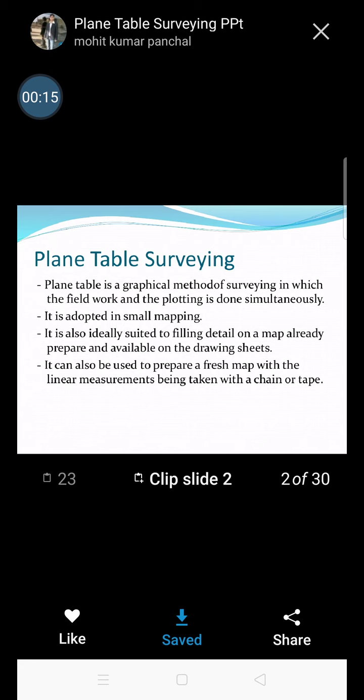We have started plane table surveying. In our previous lecture, we have seen plane table survey, a graphical method of surveying in which fieldwork and plotting is carried out simultaneously, which is used for small scale map. The plane table consists of a plane table and a tripod stand.

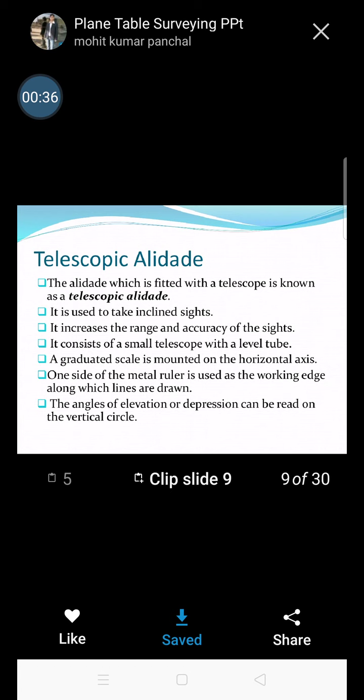The instrument used for bisecting the object is known as alidade, as seen in the picture. There are two types of alidade. One is called simple alidade, and this other one is called telescopic alidade.

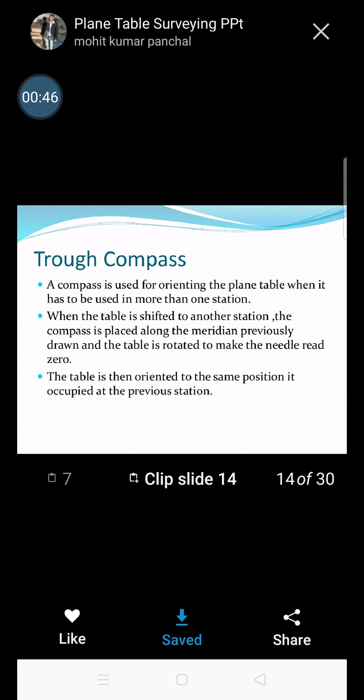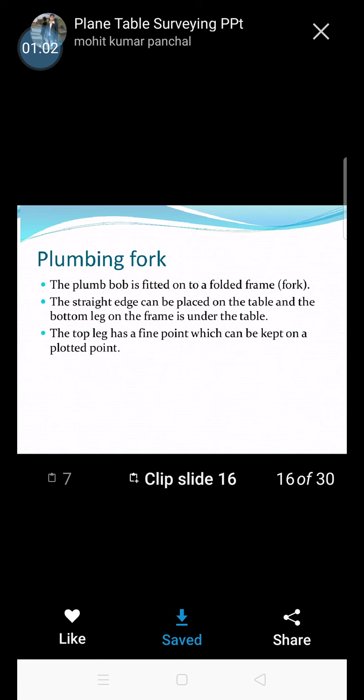For leveling the instrument, a spirit level is used. Trough compass is used for the purpose of marking the north direction and for the purpose of orientation as well. As we can see here, for centering purpose a U fork is used.

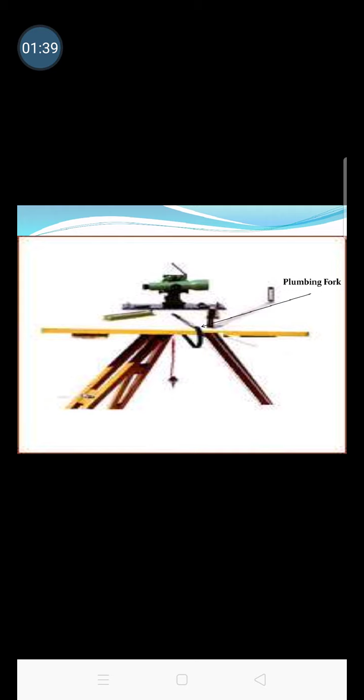Along with all these accessories, the other accessories required for plane table survey are a celluloid or zinc drawing paper sheet, drawing clips, pencil, eraser and waterproof cover. Unless and until all these accessories are with us, we are not able to use the plane table in the field.

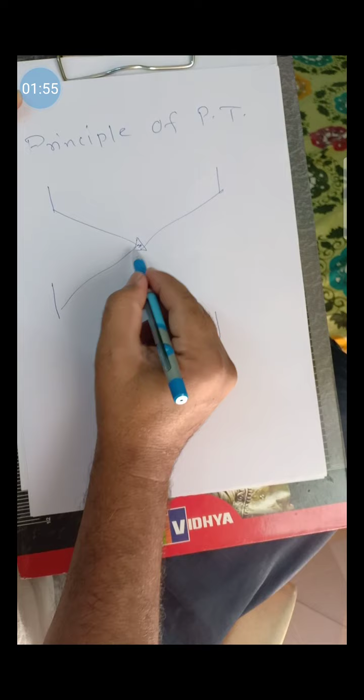Hereafter, before using the plane table in the field, we will study the principle of plane table. The principle of plane table is that, as you can see in the figure, there are some objects, and the lines drawn through the different objects should pass through a single point. This is the basic principle of plane table surveying.

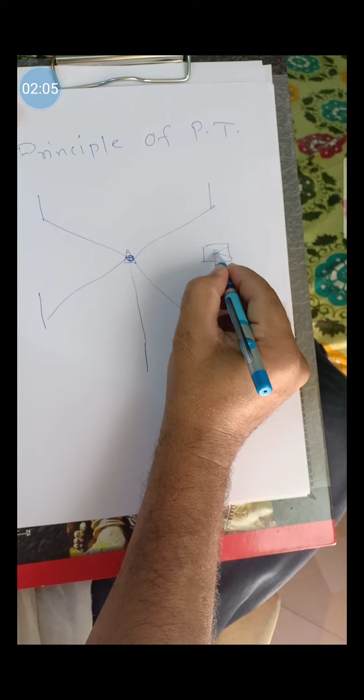You can see in the figure the different 5 objects, 5 ranging rods are there, and lines drawn are passing through a single point. That is the principle of plane table surveying.

That is one point that has been skipped. Now we can see the different temporary adjustments before actually using the instrument in the field.

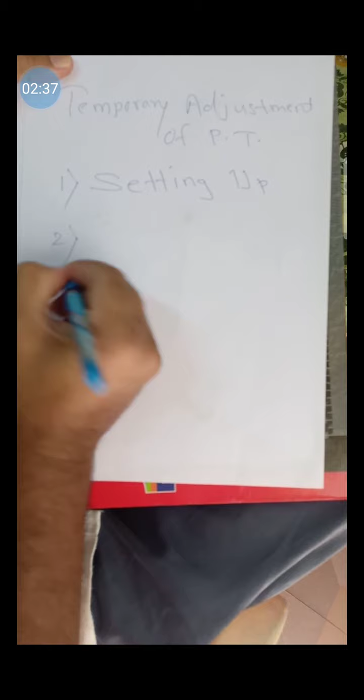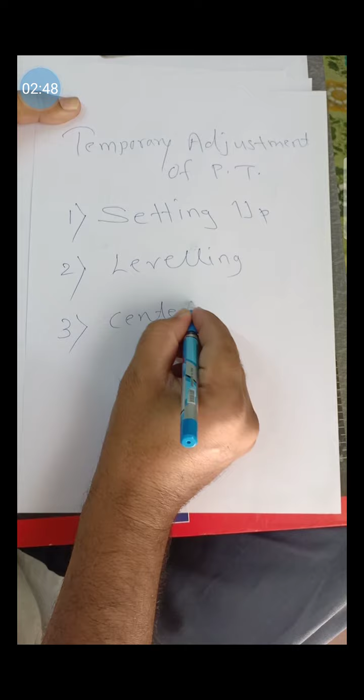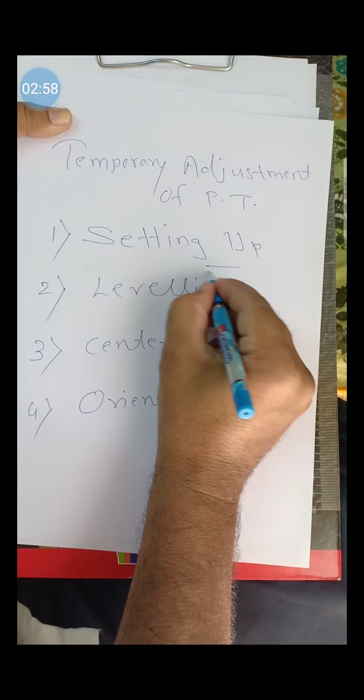We have to carry out some temporary adjustments before using the instrument, and the very first adjustment is setting up the instrument on the tripod stand with the help of a wing nut. A butterfly-like wing nut is there, which you have to use for setting up the instrument to a convenient height, and with the help of the wing nut fix the plane table on the tripod stand up to a convenient height.

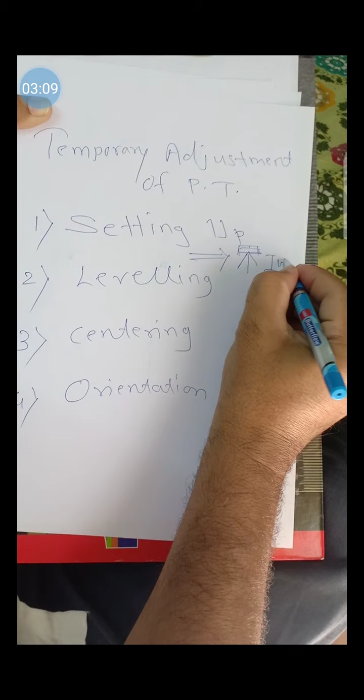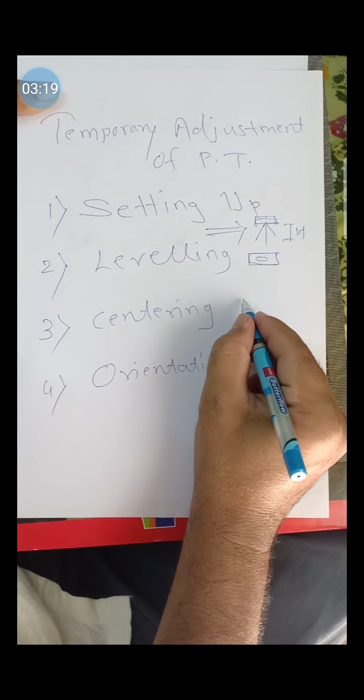For the purpose of leveling, you have to set it up to a convenient height so that you are able to draw the ray. For leveling, you have to use the spirit level, which is one of the accessories of the instrument, which you have to keep on all 4 sides of the plane table and see if the instrument is level or not.

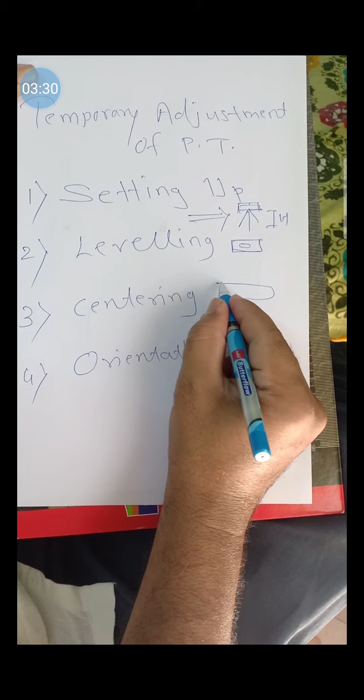For centering purpose, exactly the U fork or plumbing fork is used, and you have to see if the plumb line and the plumbing fork and the peg are in one line or not.

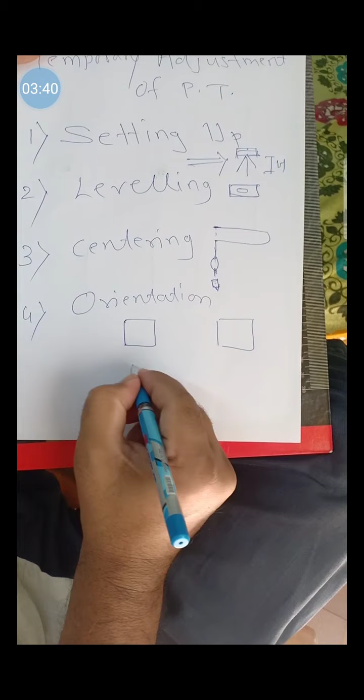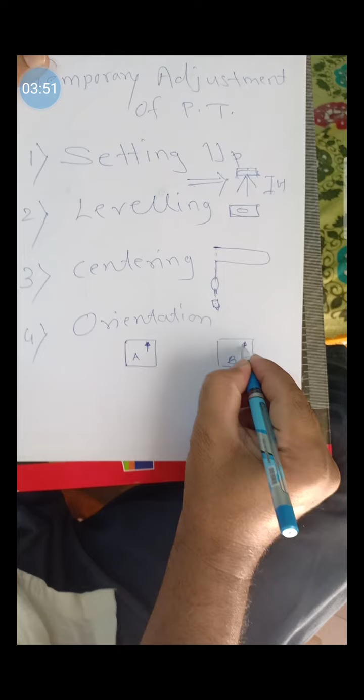The fourth temporary adjustment is orientation. When the stations are more than one, you have to carry out the fourth temporary adjustment, which is called orientation. Otherwise, if there is only one station, then we are not supposed to carry out the orientation.

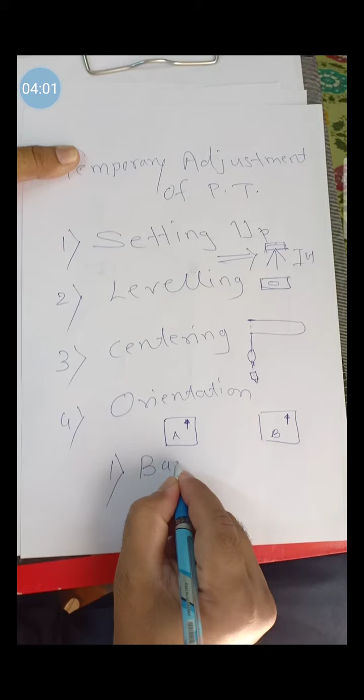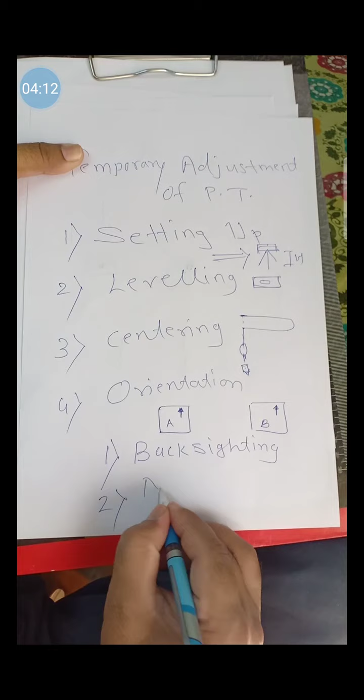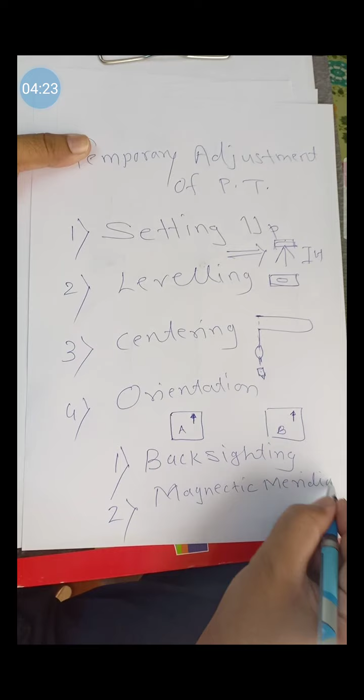For carrying out orientation, there are 2 methods: one is the back sighting method, and the second is the magnetic meridian method. So the temporary adjustments are setting up, leveling, centering and orientation. In orientation, the 2 methods are back sighting and magnetic meridian.

What is orientation? Orientation is the process of keeping the table at each of the successive stations parallel to the position which it occupied at the previous station.

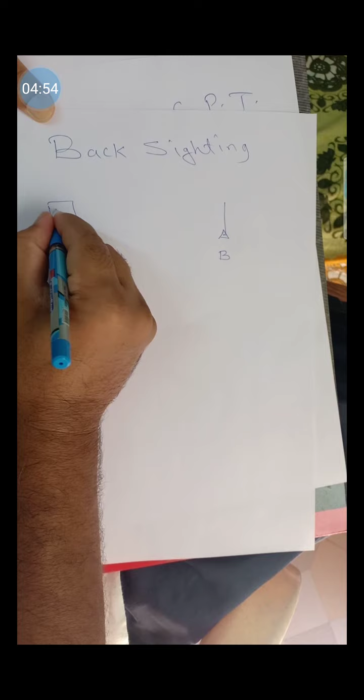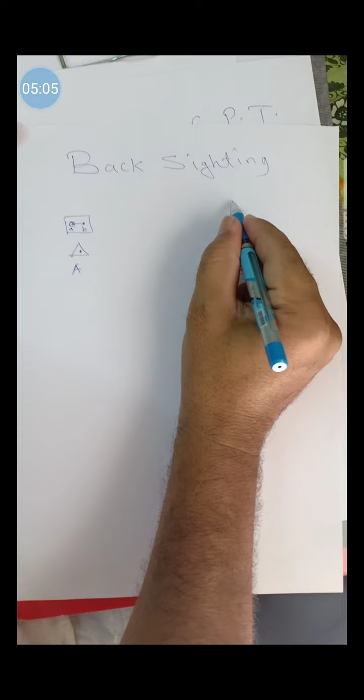You have carried out all the temporary adjustments at station A and plotted the AB line, and then you have shifted to station B. Already on your paper the line BA is there. The line on the ground and the line on the paper should be parallel.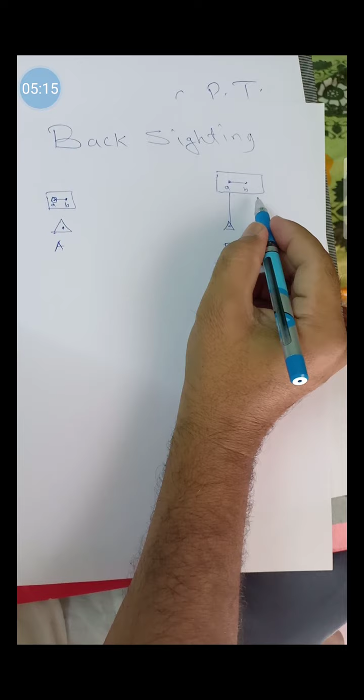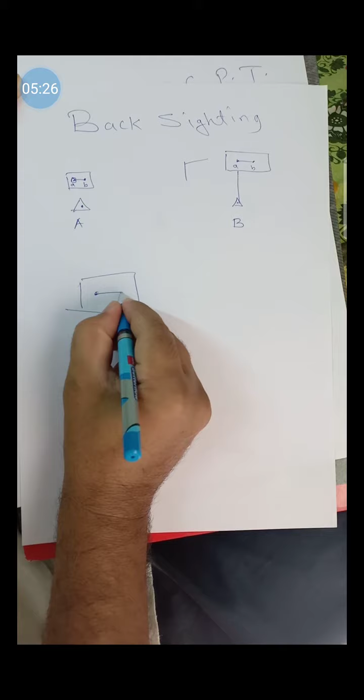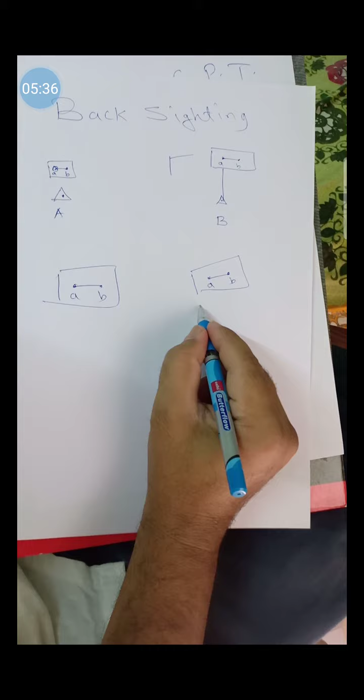The line on the ground and line on the paper should be parallel. If they are not matching, your orientation adjustment is not executed. So for that purpose, you can see here, if the line is inclined, it means the station line on the paper and the line on the ground are not matching.

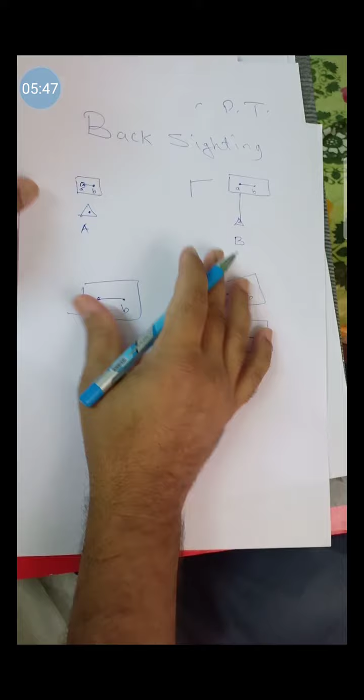For that, you have to release the wing nut, carry out all the temporary adjustments at station B, release the wing nut and swing your table to have the line on paper and line on ground parallel to each other, so that in the back sighting method, going to point B and back sighting A gives the successive point parallel, having an orientation carried out.

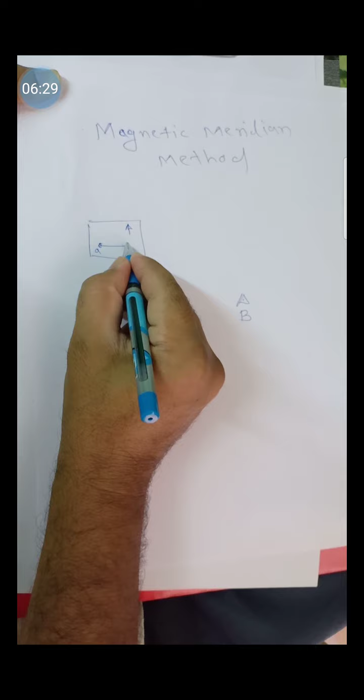The next method is the magnetic meridian method. In this method, we have a trough compass. After carrying out all the temporary adjustments at station A, we mark the north direction as shown with the trough compass, and we shift the instrument to station B.

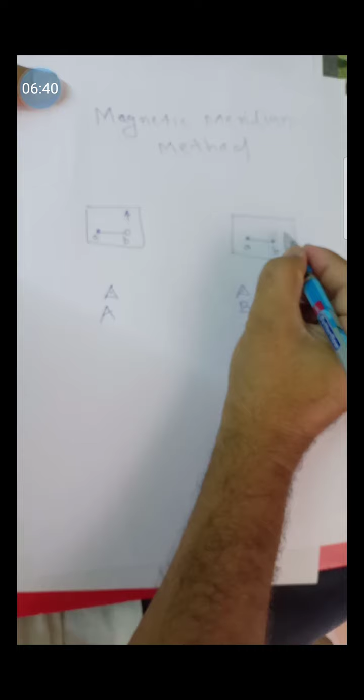Then already the line BA is there, which we have used in the back sighting method, but we have to see the north direction as shown in the figure. North at station A is not matching to the north at station B. Then release the wing nut and move the table till the north direction at A and B is the same, which you have to carry out with the help of your trough compass.

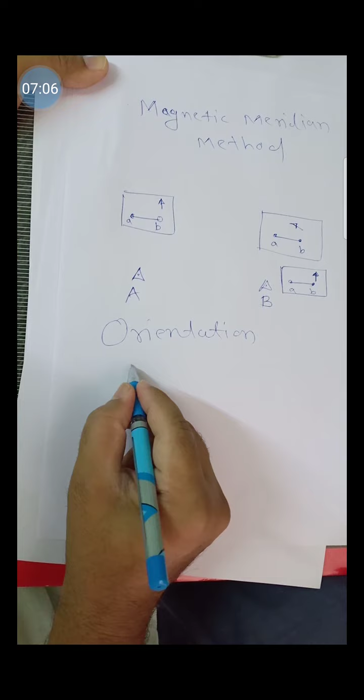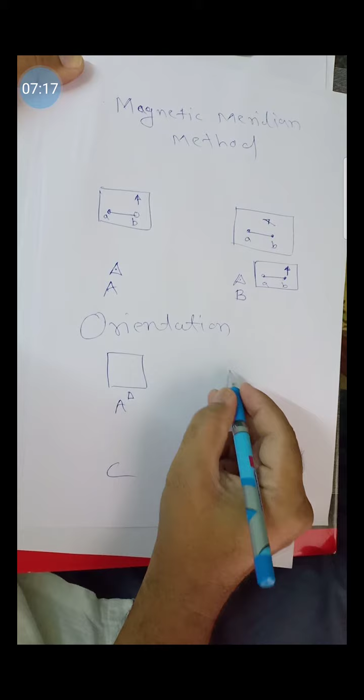So once again I am explaining what is orientation. Orientation is the process of keeping the table at each of the successive stations parallel to the position which it occupied at the first station. That is called orientation, and there are two methods: back sighting method and magnetic meridian method.

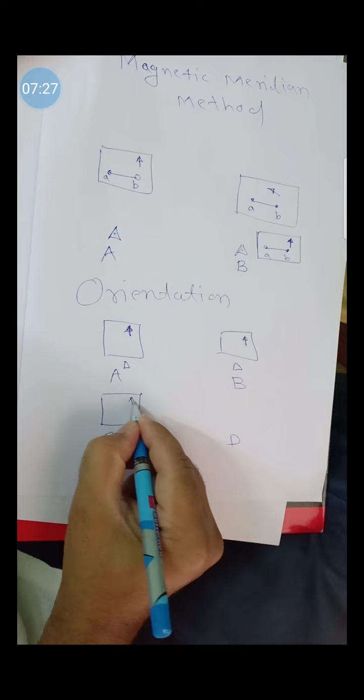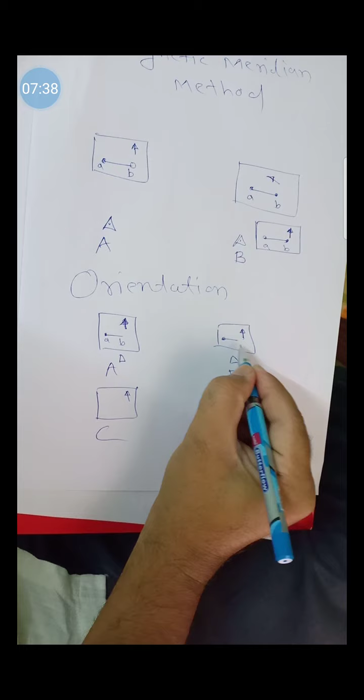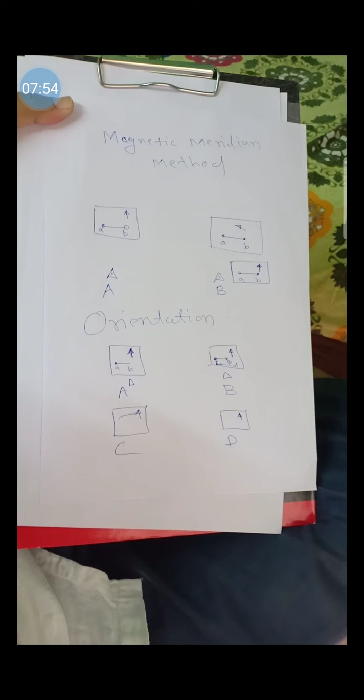You can see here in the picture, these are the four stations A, B, C, D. Whatever position the instrument occupied at station A, that position of the instrument must be occupied at consecutive stations B, C, D and so on. Once again, the lines on the ground should be parallel to the lines on the paper.